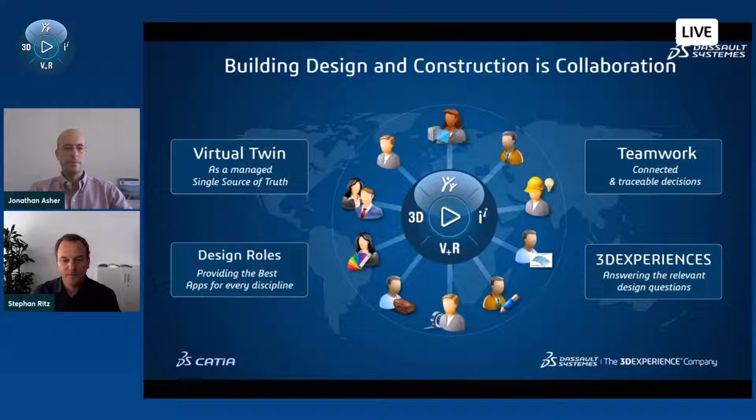So why do we do this? Because actually all the people involved in building design and constructions have a common need. They want to have a precise communication between all the different silos. They want to break the silos, precisely communicate, and take accurate decisions. And as one of the facts that I want to mention is actually they don't speak the same language. It might be sometimes a different professional language, so they are from different disciplines, so they have different ways to communicate, different ways to express themselves.

So there's already a first language barrier, but it's also an international industry. So design might be done on one part of the world, construction on the other part of the world. So just 2 examples that show us that there might be a lot of barriers to overcome in terms of language. And that's where we come to visualization, because what could be better than actually looking at the final building, the final construction, the final infrastructure, like you will see it when it's built, or your customer will see it when it's built. And since pictures on a screen, renderings or movies might be limited, we also add VR, because this enables you actually to jump in front of your building or inside your building, as you can do with the final construction, with the final building also.

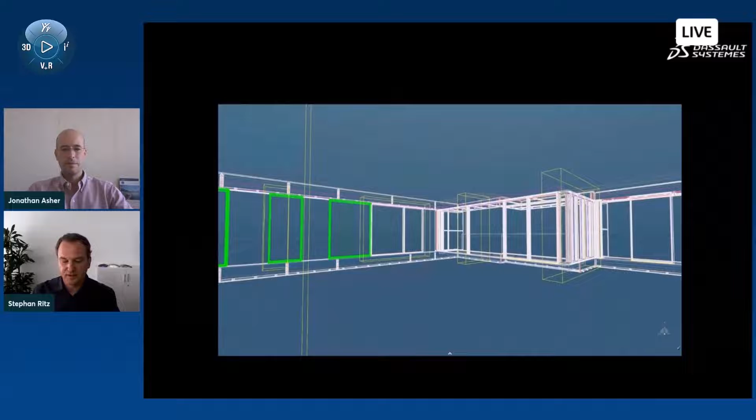So these are major aspects I want to highlight for you today. So visualization and VR, not just standalone, also connected to the power of the 3DEXPERIENCE platform and the major benefits I was introducing before. So this should enable you to take the traditional drawing, as Jonathan explained, and do 3D sketches out of them. This is already a very established and widely used capability. Also to make faces, surfaces, and rooms out of this is already quite widely used.

We go a level further now with CATIA Live Rendering. We introduce materials, so you can directly put materials, appearances on your 3D experience room. And it's not just the material that live rendering is adding, also the environment, because your construction site, your building might be located somewhere and has a certain context. Speaking about context, of course, live rendering is also enabling light and shadow. As you can see here, the lighting and shadow situation is quite important.

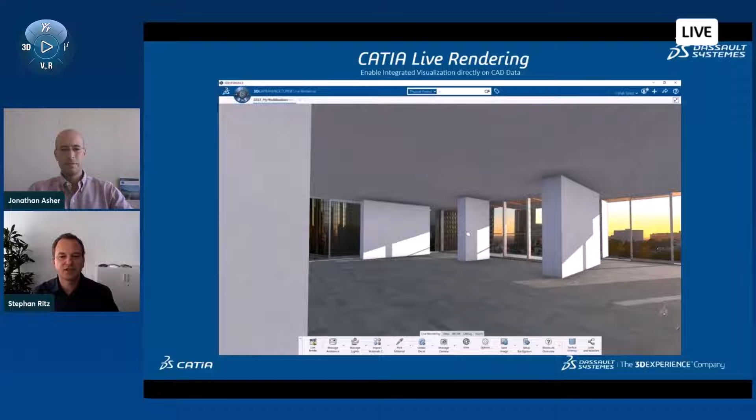It's also part of the context of your building or your construction site. And of course, it's not just a picture that we render here, it's actually a 3D experience. So you can really experience your building, your different designs, whatever you need in 3D. That's why we call it the 3DEXPERIENCE Platform.

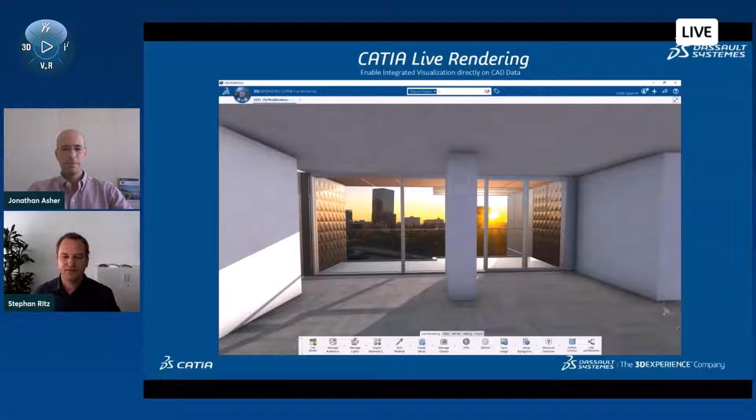What you see in here is OpenGL that's enabled in most applications in the design phase. Talking about precision, this is real-time rendering. Of course, CATIA Live Rendering is also enabling global illumination and ray tracing for very precise renderings and views, or interactive sessions to make a precise decision and really have everything taken into consideration from a realistic and realism perspective.

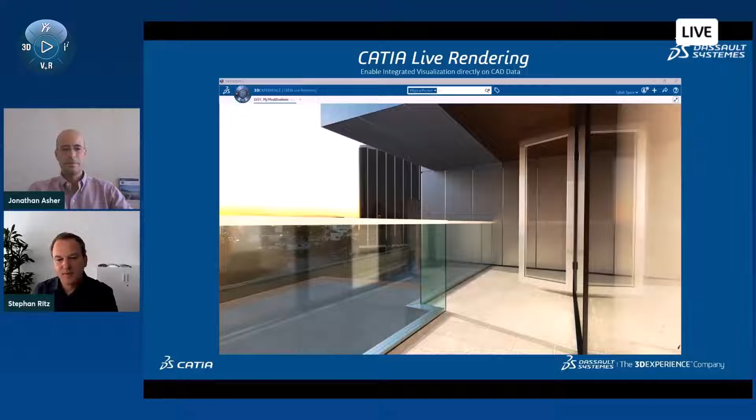So in a nutshell, CATIA Live Rendering is the first tool I want to introduce to you to create a realistic virtual twin with precise materials, lighting, and cameras to enable the collaboration and decision-making I was mentioning before, inside the 3D design process and inside CATIA 3D design apps.

In order to do so, CATIA Live Rendering is taking care of some very important subjects. First of all, materials, as I mentioned before, and there are different ways to work with material. I will touch it in a few minutes. Environments, we call them ambiences, to build the context and also the lighting situation of your future construction or building. Lighting, because it's not just the environment, it's also the building that might contain lights, so I will show you an example of how to create lights. And cameras, to create the specific views that you want of your building or inside your building or inside your site.

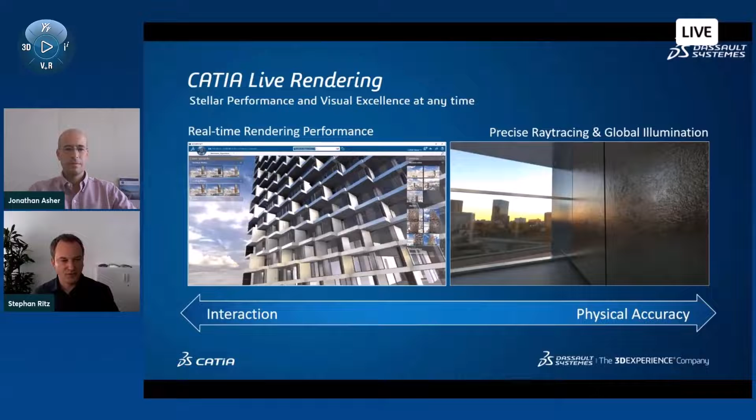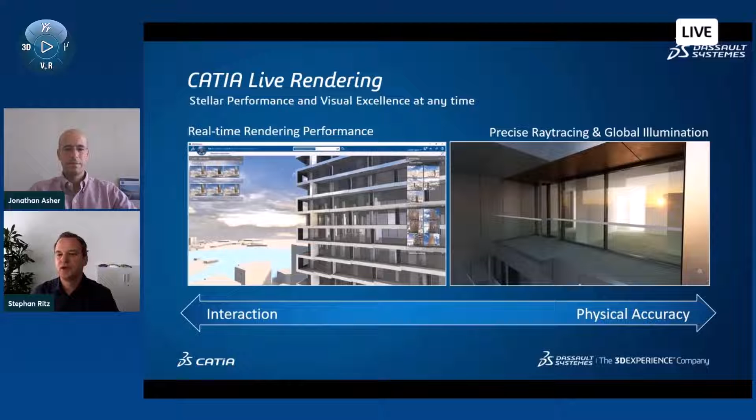It also provides you rendering capabilities, two different render modes that we were touching already in our introduction. On one side, we have real-time rendering, which is there to really interactively discuss different proposals, interactively work with your different design data. As you can see here, it is quite performing. It enables you to work in CAD, or as shown here, with already visualization applied. This enables you to really move around in your different design proposals, interactively having a decision-making process. On the other side, CATIA Live Rendering is enabling precise ray tracing and global illumination, as you can see on the right side. This is really the level of rendering that we will need for a final decision, and it looks like the final building in many areas will look like.

So we have here already touched a little bit with some examples from the interior and exterior, the four subjects. I want to go a little bit further and really go through the different capabilities with you in this little example. So first, we focus on cameras, lighting, and ambiences.

You see our interior here, and as shown before, the interior is interactively experienceable with global illumination. So it's really an interactive session. It might have limits in terms of judgment and realism with the OpenGL rendering, but it's interactive. We can switch on GI, global illumination, for precise lighting, shadows, and also the reflection and the colors of the reflection and the light. We can access here, you see also different components from the database.

We can also switch on lights that we built with live rendering. This is just a very quick example that shows you already that we can switch on one side between very precise rendering and very interactive rendering. We can leverage the power of the 3D Experience platform by bringing in different components and variants of our 3D design, and also leverage visualization here and the live rendering capabilities with the lights that we just switched on.

So that already showed the first important capability of CATIA Live Rendering. It has a light sources management that is quite flexible and also interactively usable. That means everything you see here in these menus can be changed while you run your global illumination session, for instance, and it contains live updates during your ray trace or while GI is switched on. So your interactivity in the viewport is possible even if you change parameters on the fly.

You can have different light types created: point light, spotlight, area light, or directional light. And the parameters are artistic if you want, or you can also choose to go to physical-based parameters. For instance, you can put in the color temperature in Kelvin, or the intensity in candela or lumen, if you have the physical parameters at your hand. We also support photometric lights. This is just one of the examples that shows you how powerful this function is.

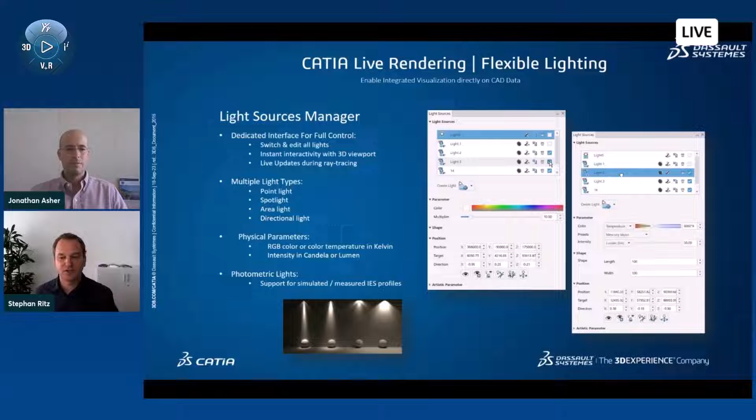But let's go directly back to our example. Let's switch on the light sources manager and see some of the lights in action here, some of the functionalities I described to you. You can switch through different lights. This time you are really in the light sources manager, you don't just hide and show them. You can adjust the intensity, for instance, and by adjusting it, you see the change directly in the viewport.

You can also change the temperature, for instance, of the color. And together with a choice of materials that we will touch on a little bit later, you get a very powerful session of visualization, a very powerful capability to judge your layout of the room in combination with the lighting.

That's a very simple but powerful use case that already shows how 3D experiences can contribute towards your decision-making process in terms of light, visualization, and materials. We have also other capabilities. We have seen an interior example. For the exterior, we have a built-in capability called the sun and sky system. Very often you want to decide for your building that it has to be lit at a certain daytime, and you know the location. With the sun and sky system, you can actually set this very precisely.

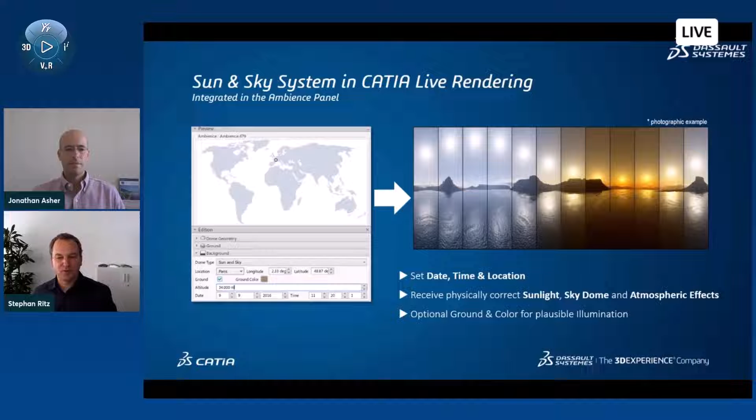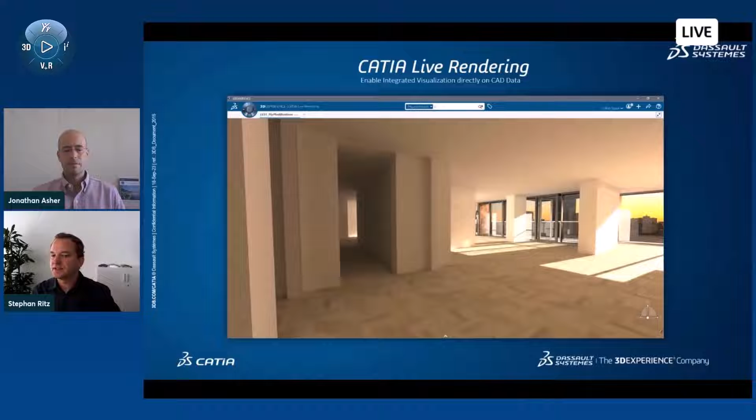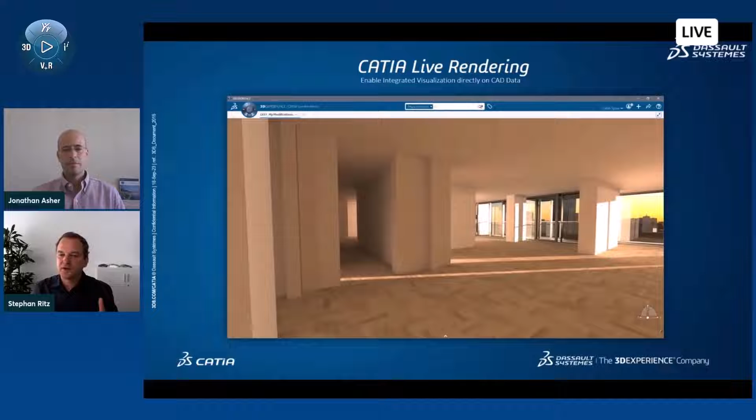So if you know when and where the building is, you just put these values inside the sun and sky system, and you get automatically a physically correct sunlight, including atmospheric effects, so the color of the light is changing. I used this also in our example for the exterior lighting evaluation. You see here the first lighting situation at a certain daytime, a later daytime, and even later, and it's changing—not just the light or the shadow, but also the light colors. So you see the reflection of the walls with certain light colors from the exterior create a completely different ambience and appearance in the interior of your building.

After seeing these first capabilities with cameras, lighting, and ambiences in the interior, I want to show you an example from the outside of the building, because it's also very important and interesting—there we can make much more use of the ambience capabilities we have built in. This is a little older example.

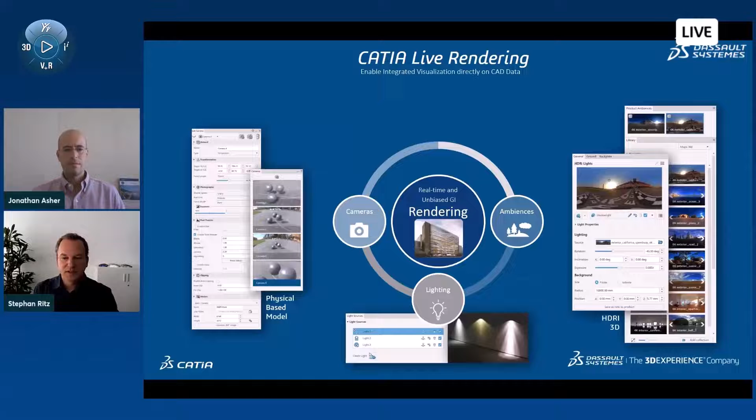That's why in the beginning, when we switch on global illumination, you see some first noise, but this accumulates quite fast. Then you see a good reflection of our ambience, our environment, in the windows. By changing the environment, you get a completely different reflection and a completely different look of our exterior. This is not the only functionality we can interactively use quickly—we can also take our light manager and switch on some lights in the interior. This way we get a very, very good assessment capability between interior lighting and exterior lighting.

I have to mention that this scene here is shown together with CAD makers at the NVIDIA GTC. So the data set is shown together with them at NVIDIA GTC, as some other examples I will show later on.

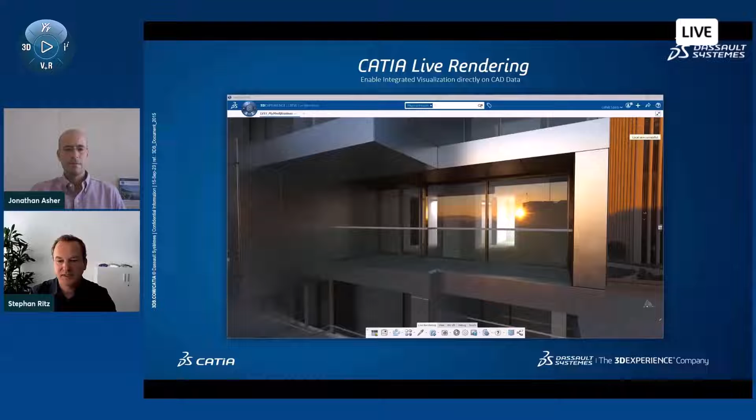So now we have covered use cases using cameras, ambiences, and lighting, with precise and real-time rendering from CATIA Live Rendering. Now let's take a look at the materials involved. As I was already mentioning, there are a lot of requirements toward materials, and you see that we have a range of usage, from precise measured materials to flexible procedural materials. That's why we came up with a new material type inside the 3D Experience platform, inside CATIA Live Rendering, that we call the DSPBR material model.

It is, first of all, an open model and open standard—it's GitHub documented, including examples and other subjects. So if you plan to build up your materials in combination with your CAD inside your environment, inside the 3D Experience platform, you have an open standard, so you are secure for the future.

The second thing is that the DSPBR material model is a physical-based model, so it provides physical accuracy across all render modes, which is also important for communication and decision-making. And it's prepared not just for Dassault Systèmes inputs and material standards, it's also reading material types and standards from other partners, and this puts us in an industry-leading position. I mentioned Adobe Substance for flexible material ideation, X-Rite measured AxF materials for precise measured materials that we will see in a second, and, for instance, NVIDIA MDL as another important standard in the industry.

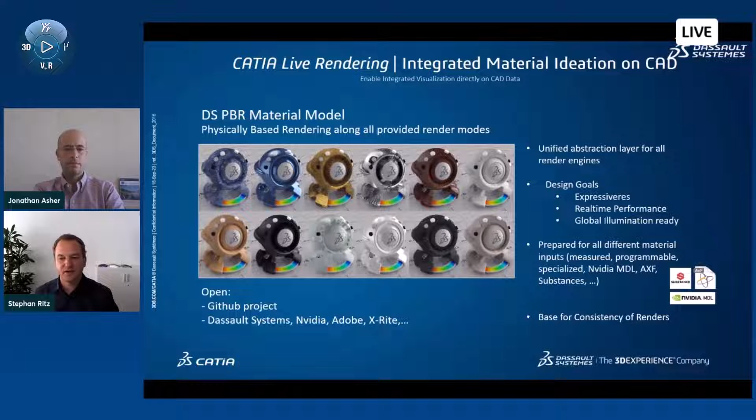This enables us to support use cases and manage a stretch between creativity and physical accuracy. On one side, we have in creativity the need for conceptual materials, where you don't know what material you want to experiment with, you want to explore possibilities, communicate the design intent, or define a target for your suppliers or other people involved. Then you need creativity and conceptual materials.

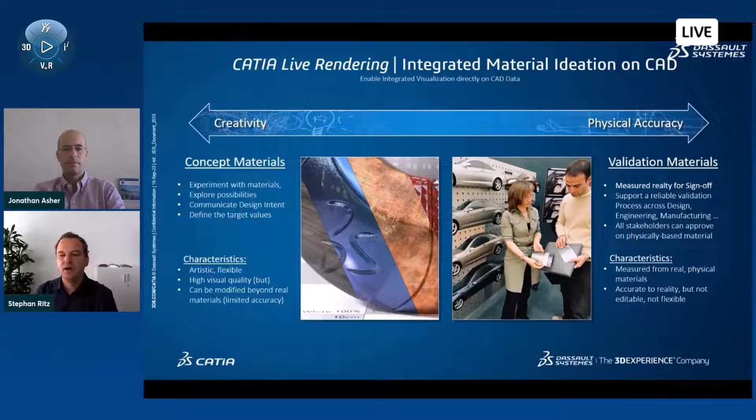On the other side, for physical accuracy, you might already have material. You have the CAD data that is precise and maybe already accepted by the customer. You have precise materials from your suppliers, for instance, and you want to scan them to be very sure they look like the final material and apply them directly on your CAD data. All of this is possible with the DSPBR material standard, which can contain many different types of materials.

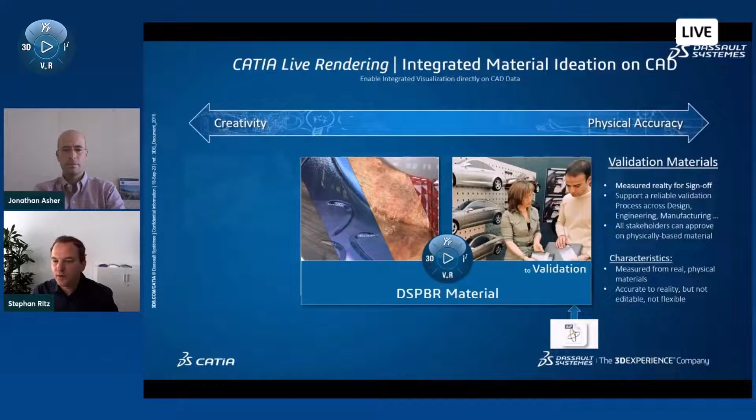Let me give you an example out of physical accuracy, together with the partner X-Rite. This partnership and the DSPBR material enable the following workflow very quickly: you take physical material samples, put them in an accepted, market-leading scanner from X-Rite to capture the material, process it with the PANTORA software to output an AxF format that can then be consumed by CATIA Live Rendering and the DSPBR material standard, and directly rendered on CAD data.

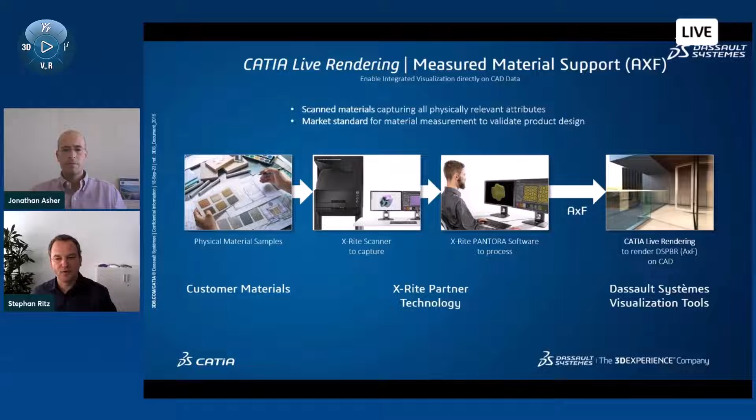That shows how DSPBR and this partnership from Dassault Systemes enable a really flexible process, because you can take a customer material, your own material, or any sample material. You can use a market-leading standard that we simply integrate with the DSPBR material and leverage the power of Dassault Systemes visualization tools on the 3DExperience platform. That's a very good example of how you can build a state-of-the-art process, leveraging the best of all worlds while staying flexible.

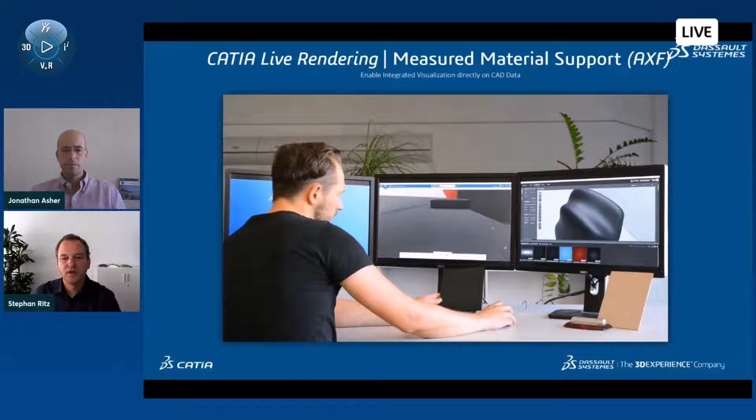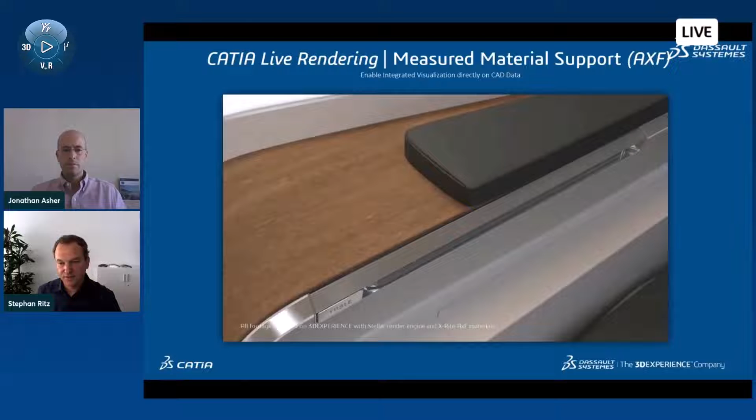So here's an example. We took this material and scanned it. I won't show you how to put it in a scanner, but what we can show is that we already have the AxF applied here in our scene. What you often see is a scene like this, comparing real and virtual. Then we can render very precise representations of our product. Precise materials and production-level 3D geometry, because it's really the CAD data underneath, combined with precise rendering capabilities, form the perfect base for a good decision, as you can see here with physically accurate materials.

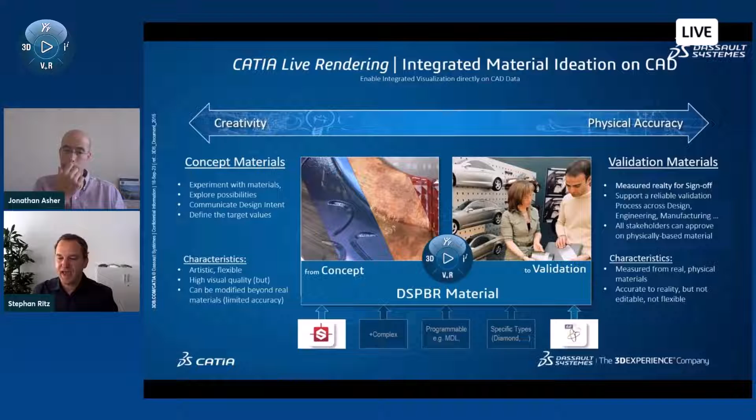After speaking about how we can use physical accurate and measured materials on one side, let's now look at the other side: how we can enable creativity with Adobe Substance Materials and their powerful usage inside the 3DExperience platform.

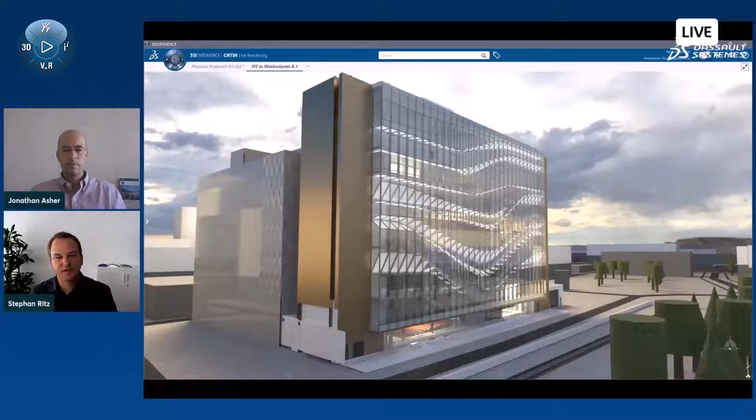So what are procedural materials? They are nothing else than formulas or mathematical descriptions of materials. You can use these formulas and inject parameters inside, and the parameters change the appearance of the materials. These parameters are exposed in CATIA Live Rendering in the software's interface, so you can interactively play with the materials and change them while they're applied on your CAD geometry. They're also compatible with real-time and global illumination, just to mention it for completeness.

Here's an example directly from CATIA Live Rendering. This cobblestone material is not a photo, not a scan, not a texture—it's a procedural material, a substance material. By moving a slider, you can actually add more water, change the pattern of the material, or reduce the water.

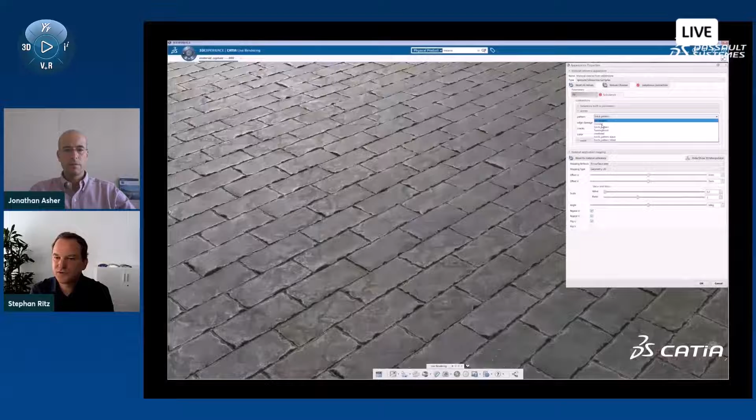You can say now, okay, that's a picture, but I want to show it also in action directly in CATIA Live Rendering, and show you the interface, and that it's really interactive and that you can use it in an interactive session. So we can change, for instance, the pattern, inject it in the formula, changing multiple parameters to give you different patterns. We have easy understandable parameters exposed here, like edge damage, that you can use to make more damage in the edges, introduce cracks, or change colors and other attributes.

It shows you how interactive and intuitive you can change a material and have a creative session on a different material type directly in CATIA Live Rendering in the 3DEXPERIENCE platform.

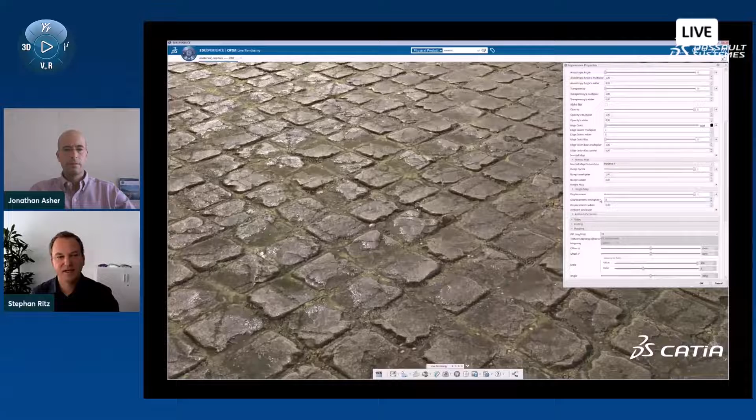So now in our example on the building, we actually applied a procedural material here on the facade that I was mentioning before. And the session was about what kind of facade, with which tiles, which size, and so on we can use. And when we take a look closer and open the appearance properties menu here, you see that we have some parameters exposed.

And we can change, for instance, the offset between the different lines of our facade. So we can make no offset or introduce an offset. This is already very powerful, and it's directly interactive, doable in CATIA Live Rendering.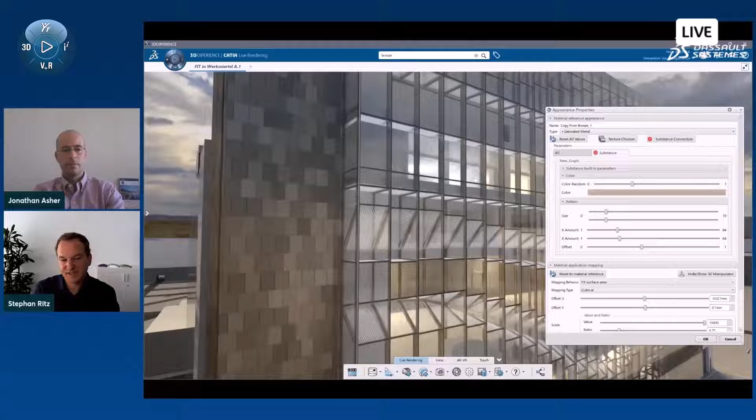You can also change not just the offset, but also the tile size and other parameters to really play with our design and get a first inspiration and maybe a first direction, or set a target how we can do the facade. You might mention, okay, it's not the right perspective, so no one will see it from this perspective except I have a building on the other side and I climbed up the stairs.

That's correct, and that's also something we thought about. And what could be better than standing in front of the building or jumping inside the building or seeing the facade from the perspective of a pedestrian like we will do on a daily basis later on. That's why we combined the use case with our CATIA immersive enablers.

So these enablers are there to make or enable an immersive experience directly inside the CATIA applications. We have the virtual reality reviewer and the immersive visual experience for single user, supporting HMDs, immersive walls and caves, and the immersive collaboration experience for people to work together.

And it's so special because they are just enablers. You can keep using your software with what you did before, with high quality visualization or not. It's directly enabled inside the 3D experience application. You can have it immediately available, so you don't have to switch your workflow or something. You just switch on VR. There's no data conversion and no tool change involved.

For our example, we use virtual reality reviewer and immersive visual experience. We take CATIA Live Rendering as we have used it before in the desktop mode and empower it with immersive visual experience or virtual reality reviewer to be VR ready. And what you get actually is a hybrid environment, so CATIA Live Rendering VR, we call it.

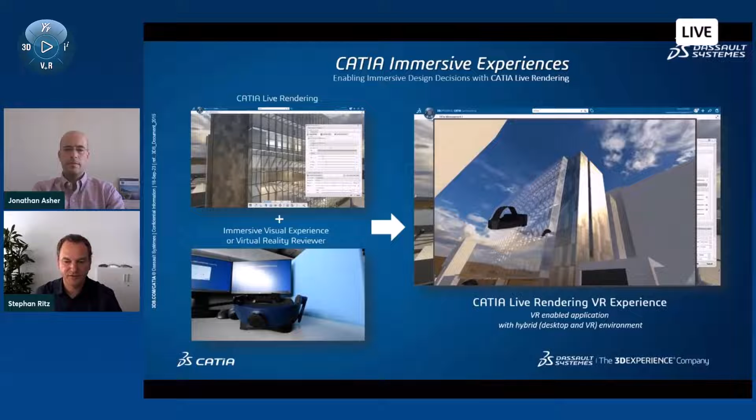So we can see in VR directly our data. We can stand in front of our building. At the same time, we have still our original tool, Live Rendering, here for hybrid usage ready.

So here's an example, a very simple one that explains what we mean by this. You see here actually one person in VR and the other person working on the 3DEXPERIENCE platform with CATIA Natural Shape. They are changing the native geometry. They are working with it, with the native tools in Natural Shape, and do just a simple example here, changing the valve.

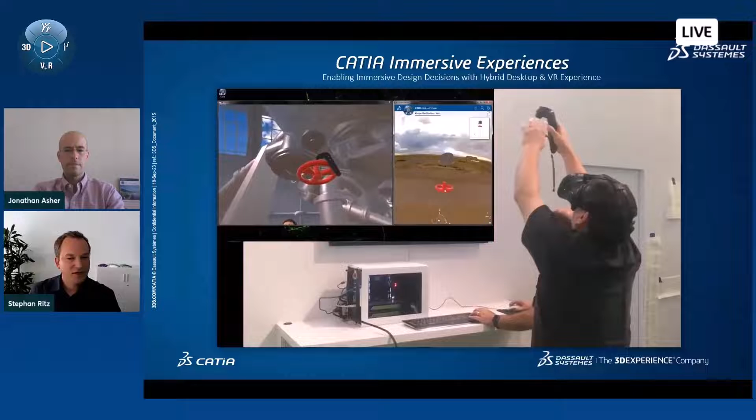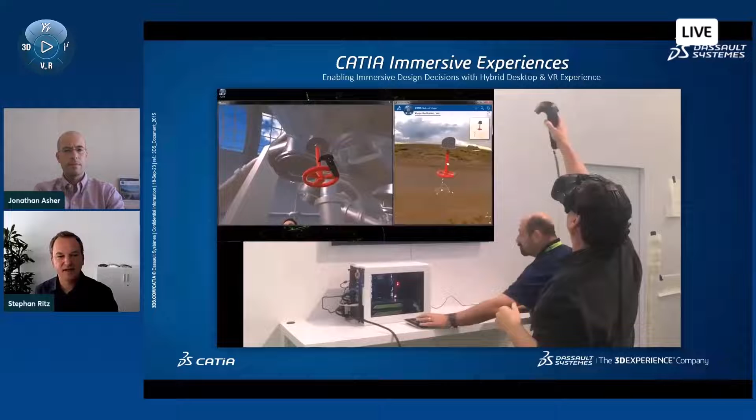They make it a little bit longer. And at the same time, while an engineer, for instance, on the desktop is doing his design, another person can check the usability, can evaluate it directly in VR. And this can be done not just with simple examples like this. This can be done, of course, in a much more complex context.

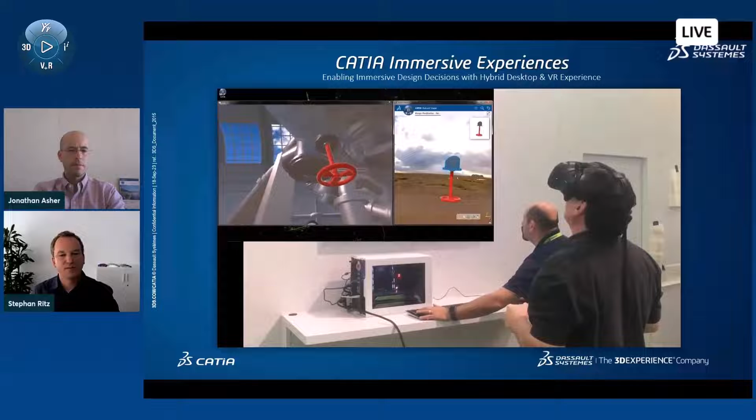Very simple example that we want to use now together with our facade. So when we come back to our building and the facade example, you see two people are working here, and the person on the desktop is still in control of the procedural material.

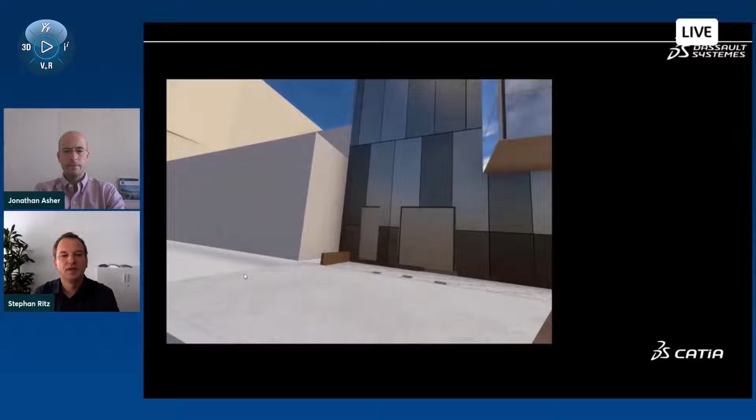The other person actually is able to do what we were desiring before. It is able to walk in front of the building, walk around, take the view or perspective from a pedestrian or from a later user on the street.

And that's very powerful because you see that the different perspectives together with the correct lighting situation, reflections, and so on create a completely different appearance and also a different feedback maybe. And then you can still play with the same capabilities that we have shown before.

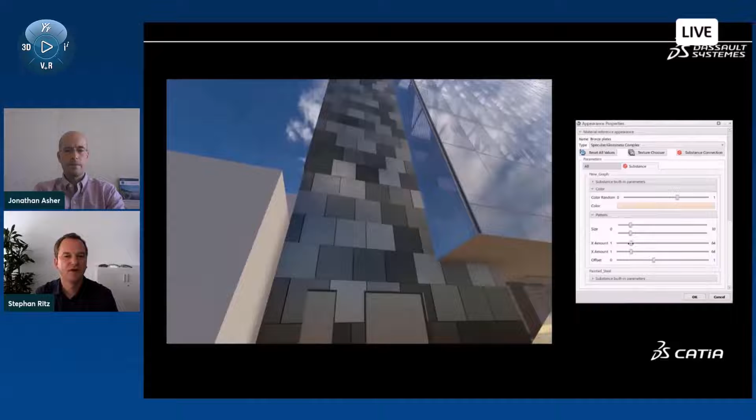You can adjust the tiles here. You see that the reflection is also very important for the smaller tiles. And you might get completely different results from this perspective than you might have from your desktop session that we have seen before. Of course, we can play with the offset, which is a very important functionality here in this demonstration. But also you see that there is a kind of different color randomness.

This we can also reduce, and we can expose many more parameters. What we see here is just examples.

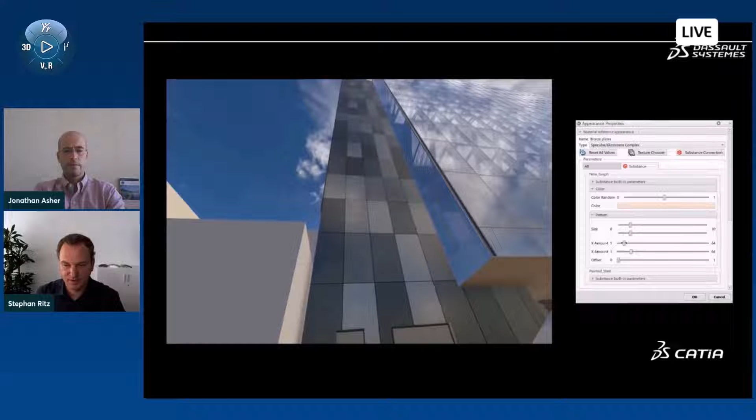So it shows you how powerful the combination of visualization, procedural materials, and immersive enablers can be in a very simple use case. So we have seen already a powerful example on the facade in terms of tiling and population of the different tiles and how we arrange them and also what differentiates them. We can do also material ideation on a very precise and high quality level.

So what you see in here is a material that you might face from very close because it's on a balcony of a building. You see here that actually the material, by just a change of a parameter, can get much more detail. And the reflection together with this detailing gives you a very good first insight on what you want and how you want to actually use material and what material do you want to use.

Of course, we can go on and add more detail. You can even add more structure and see that we have a completely different appearance also in terms of reflection. And since we are in a creative session, with all the flexibility and interactivity, you can also decide to change completely the whole appearance and also the structure to start maybe with a complete new approach.

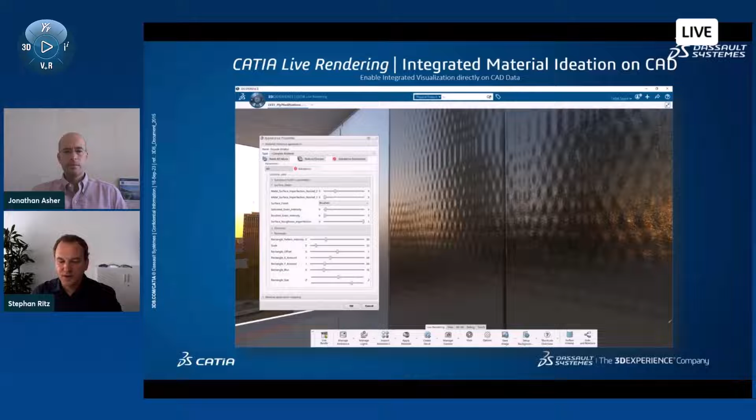So in fact, what it was is it was a live interactive session, a discussion between two people. Two people that had different samples and different inspirations and played with the material in front of them, directly applied on the CAD data. So all of this is really interactively usable and was really used in a discussion between my team members that made the demonstrator actually. At any point in time, that's a good thing.

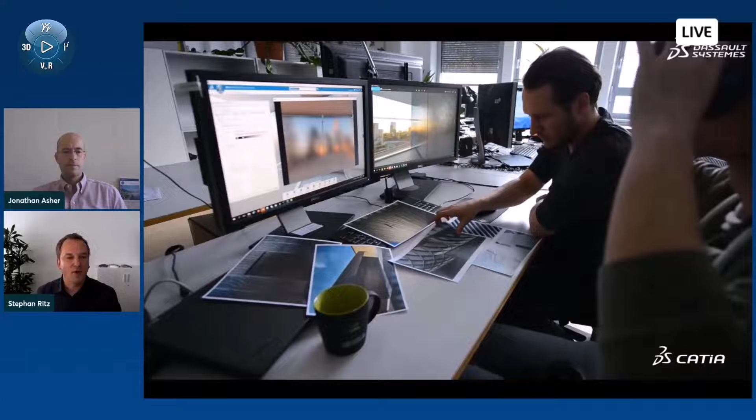You can start VR now and walk on the balcony and see not just the impact of a single perspective on the material here. You see how all the attributes and all of the things that you get out of a realistic perspective when you walk on the balcony. So you see here, by changing the material, the reflection is completely different. And this gives you a very good insight for the final material.

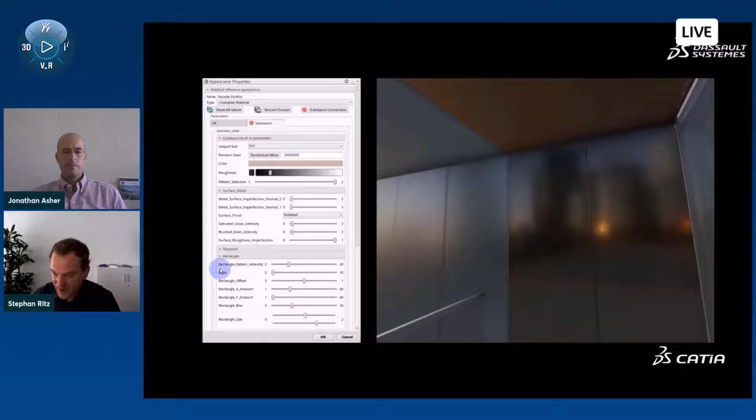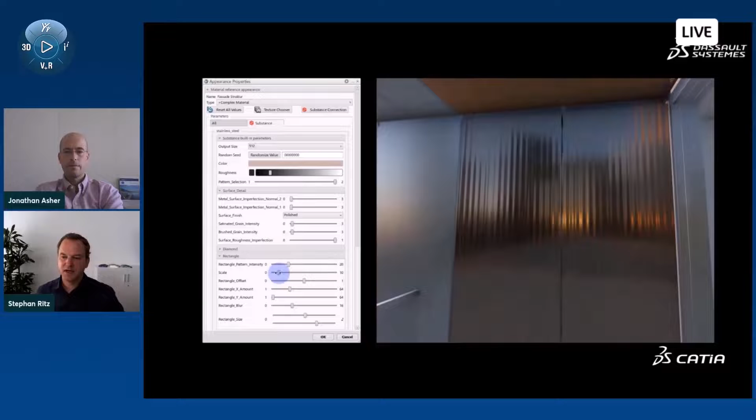Imagine that you would have this capability not just between designers, but also between designers and suppliers or suppliers and customers. It gives you a certain capability to really have a very precise communication and also an accurate decision capability. That's what we mean by this.

So we have touched now a first use case, or a set of first use cases, that showed us materials, different types of materials, ambiances, lighting, cameras, and also capabilities to combine this with the immersive modes to make accurate decisions. I want to push it a little bit further with the usage of immersive collaboration.

And this is a very good collaboration tool. And talking about collaboration, I want to come back to the slide that Jonathan showed initially here for the project delivery methods. Because you said, Jonathan, that it's a drawing-centric industry process and a lot of different silos are involved with this. And we want to show with the 3D Experience platform, with our visualization and immersive capabilities and the immersive enablers, that we can really help here building bridges.

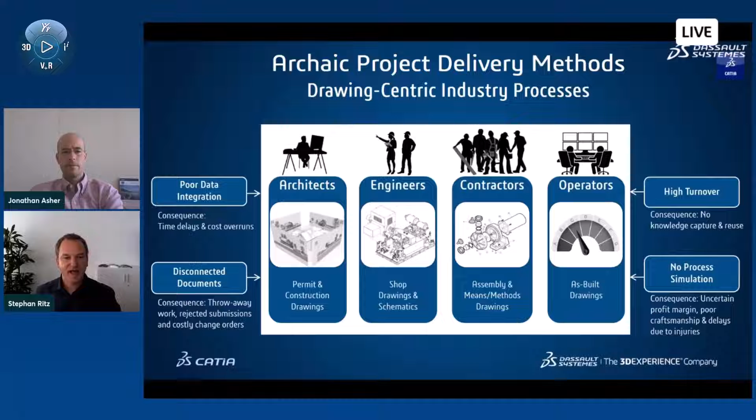So what we did actually is we took the drawing, we built in CATIA a 3D representation of the drawing. So we built 3D, an etage or a complete building, out of the drawings. We overlaid the drawing with the 3D, and by doing so, we got some very interesting insights.

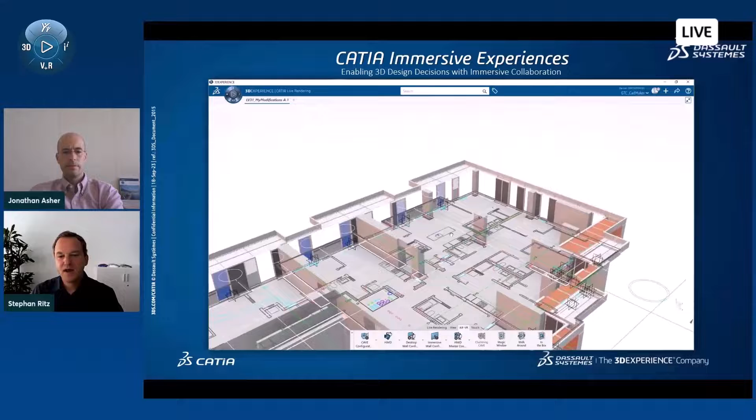So meaning, at any point in time, you are able, for instance, to check if your 3D matches the initial drawing, which is quite convenient, of course. And it's something that is given with the CATIA features. But you are also able to see, are there things in 3D space that you don't notice on a drawing? And this thanks to the power of 3D, the 3D Experience platform, and all the interactive capabilities.

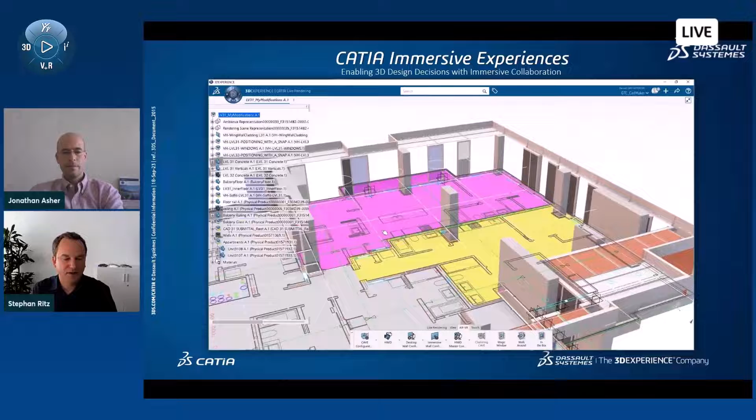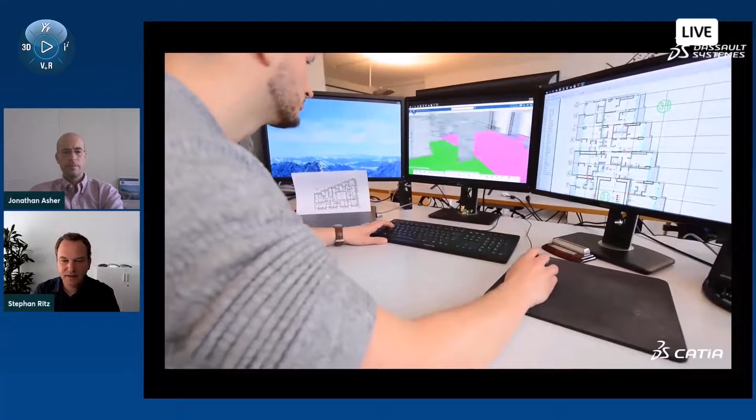You can also add, as seen here, more information like the layout of the different flats. And this is already on its own a very powerful functionality. But as I said, the 3DEXPERIENCE platform should enable collaboration between people, and we have the immersive features on top.

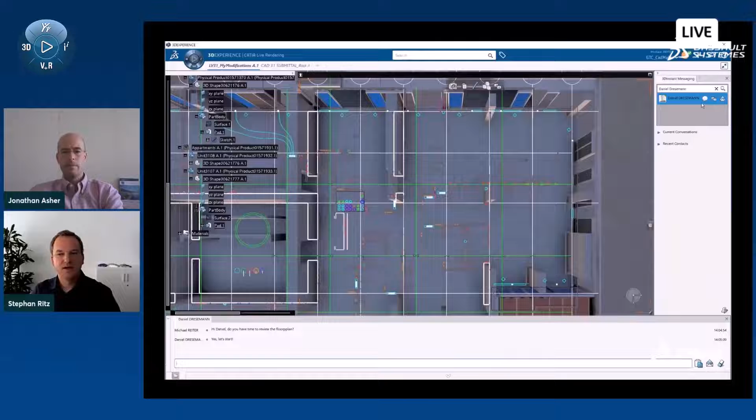What you can see here is that after one person has done his evaluation with 3DInstant Messaging, he can chat and communicate with other people on the 3DEXPERIENCE platform. They can meet, starting an interactive session with a co-review, sharing the data so they both look at the same data set from the same perspective and have a discussion on issues they want to highlight.

Once they are done with the desktop session, at any point in time they can also go into VR. What they can do in VR is meet in their plan, in their 3D, like they would meet in their construction site. This is a powerful session where people can bring different sources of information together, synced on the 3DExperience platform, and have a discussion in one-to-one scale on different perspectives and points.

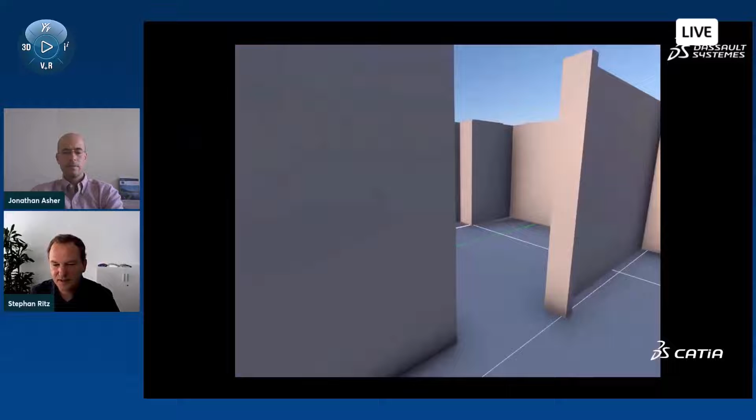You can see one person jumping out here, going into hybrid mode, switching on some walls that they have already built up, while the other person keeps working here and judges already how it's looking from a 3D perspective, like it will be on the construction site later.

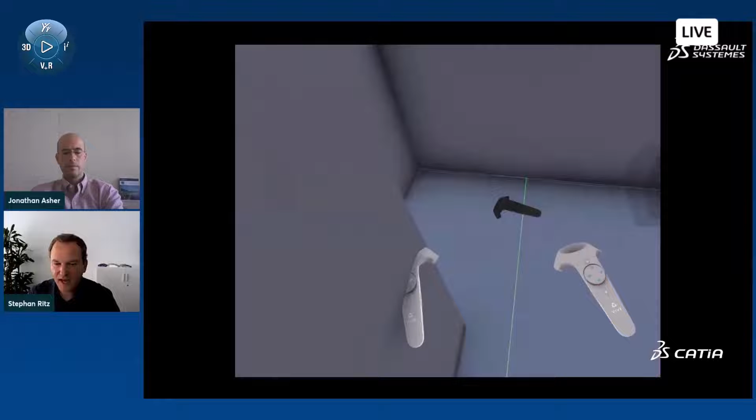It's not just this single functionality, there's a lot of power enabled. Together you can go into tight spaces like here, you can see in one-to-one scale if it's working from a customer perspective. Here it's a bathroom example. You can see if penetrations are working or if they are overlaid. You see effects and things that you just see in 3D and one-to-one scale.

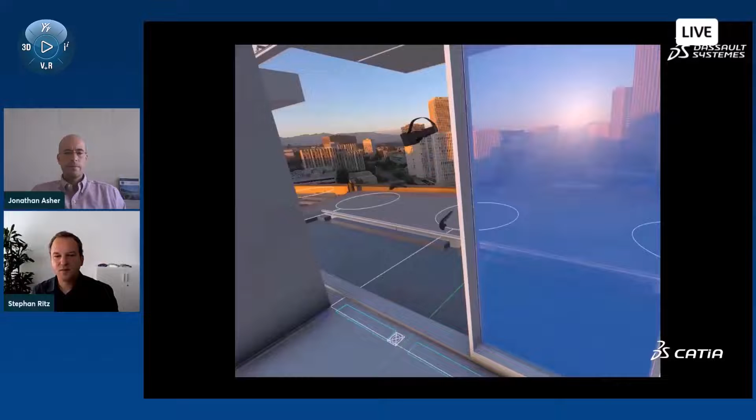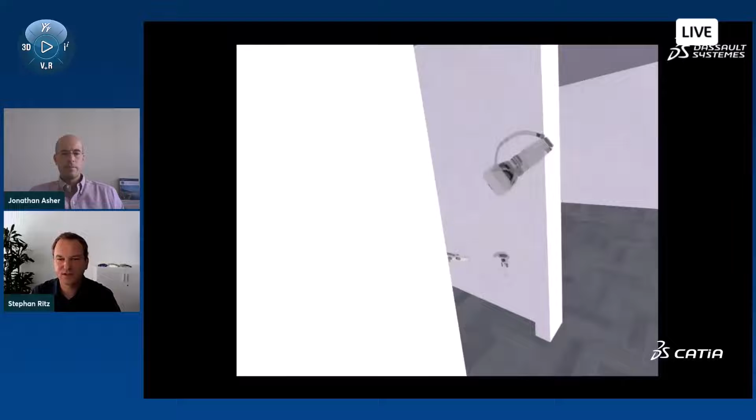What you have enabled here is usually something you might have later on when you have a construction site, but this is already all enabled during your 3D design at a very early stage. We even brought in first materials, not just to have a CAD look, but also to see lighting and shadows and the materials live. This way you can have a discussion like you would later with your customer or with people on the construction site, already very early.

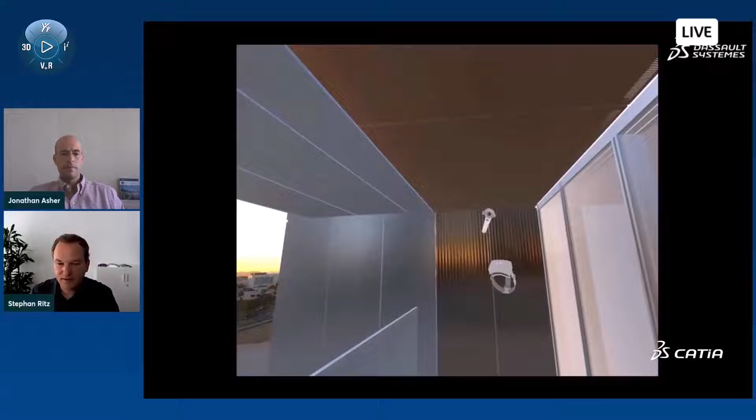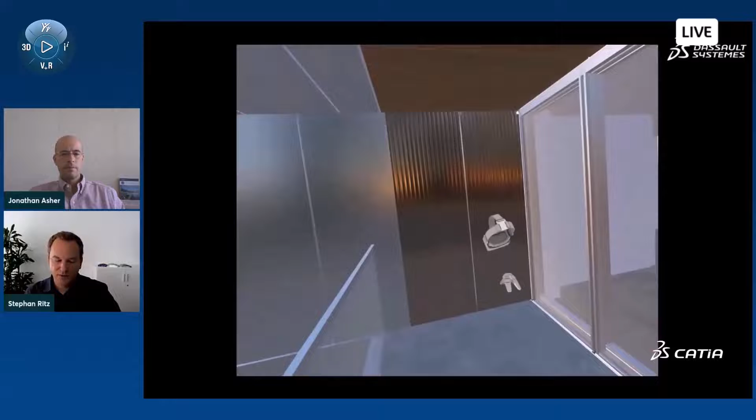It's collaborative and it's also a good communication tool for suppliers. When you take a look on the balcony, you'll see it's not just simple CAD geometry. We also find our little example here for the facade design we did before. It's there, it's available, it's all in one virtual twin. So this way we show how we can build bridges between disciplines, enabling collaboration between 2D drawings, 3D, and everyone involved in the process.

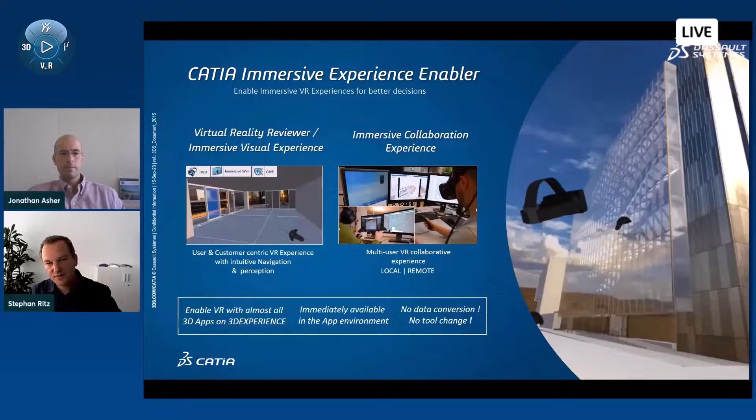Now that we've seen the power of our immersive enablers together with the capabilities of CATIA Live Rendering and visualization, I'd like to highlight one fact we haven't seen yet. We created a lot of different materials - for measured materials, we created many different options, so we have one material but different proposals.

For our facade or side panel of the balcony, we used different ambiances, different positions of the ambiances, or we can switch between different lighting options, or different camera positions or views. This is nothing else than creating multiple variants, and this is possible for visualization but also for 3D design.

You can have different options, different variants of your building for different walls, as well as different variants for your materials. What can we do to support people having a precise discussion on these variations without needing to meet in a specific design tool? That always carries the risk that one expert knows the tool while the other person might not be familiar with it. So we created an application that enables people to meet with a very simple interface and make efficient decisions on variants of your design.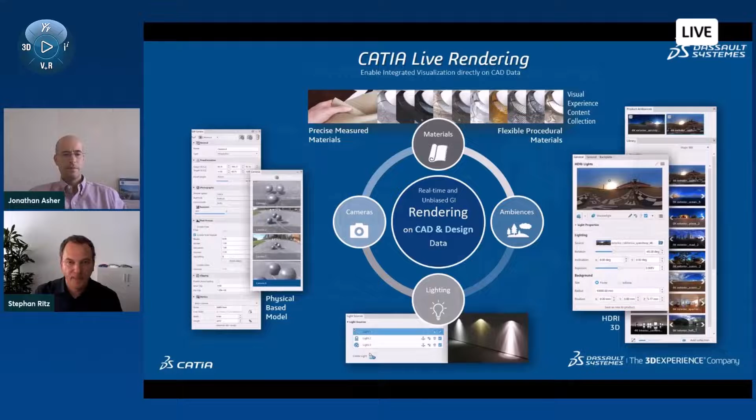That's actually the CATIA Product Perception Experience. It's an application that enables accurate design decisions on the fly, leveraging high quality visualization and VR, as we've seen before.

You can bring in a lot of different variations, as I mentioned: 3D variations, different packages of 3D, surface variations, different materials, different HMI options, different humans, different simulation results, or even kinematics or behaviors. So a lot of different inputs, and many more you can bring in here to take a decision based on them.

What you can do is actually capture, categorize, and filter these alternatives. And with this, you filter your decision. So you can set favorite or reject a variant, and so on, all with a very intuitive interface.

Let's take a look at the example on the upper screen. Two people with this application can have an active discussion on a building, switching through different variants of 3D, or just materials, or different perspectives, as you can see here. This shows that it's very efficient, and you don't need to know a specific application, because what you see here as an interface is just the variants you want to discuss, exposed.

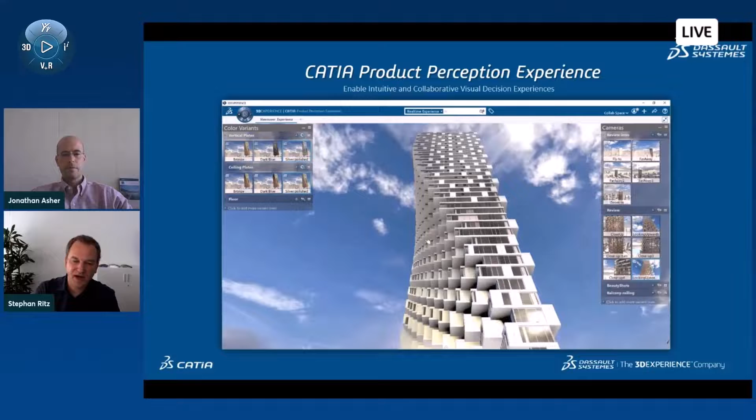This way, everyone is invited to have a discussion and participate in a decision-making process. We build bridges between different disciplines that want to meet at a certain point without knowing the other one's specific or specialized application.

For your information, CATIA Product Perception Experience is not just capable of running real-time or OpenGL graphics, it can also run in GI. At the end of your decision-making process, you can also render ray tracing and GI pictures, images, or movies out of this software.

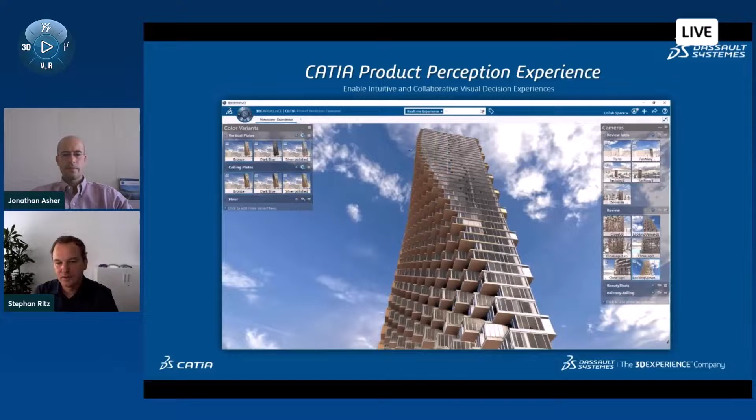As I said, we should enable everyone to make a decision. But in fact, you might look at the examples and say, okay, but I'm not a visualization expert, I'm not an expert at building up these experiences. That's why, if you've looked at the slide carefully, we also have a visual experience content collection, as shown here beside the materials.

This content collection is an enabler that just contains content. You have 3D content inside, so if you search for a plant, a chair, or a table to illustrate the interior of your building, you can do it. If you need an environment because you don't have one ready, but want to put your building in context, you can choose from a library of environments. We also have different humans inside with different clothes, if you need humans as a reference.

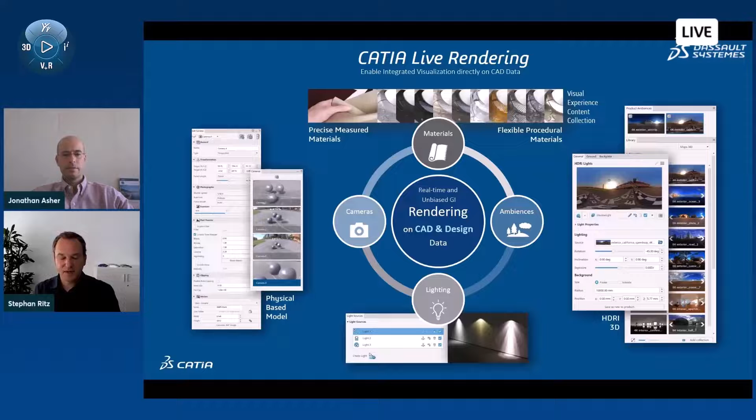We also have a lot of materials inside, and the materials I want to highlight here because this is a very good enabler for everything I've shown before. In the visual experience content collection, we have over 190 high quality materials, measured ones as well as procedural ones, to cover a wide range of different use cases. As introduced before, the procedural materials actually enable you to work with a lot of different variations of materials, enabling much more than 190 appearances out of these materials.

I will show you some examples. Glass, for instance, is in the package, because as a person who is not a professional visualization expert, you might find it difficult to set up glass. Metals, with all the different metal structures, are also built in. We searched for good industry examples to make it quite easy, and all of these metals can be directly applied on your CAD data.

We brought in wood as well. There are many woods inside and different approaches for wood, because it's also widely used these days because of sustainability. There is a wider usage of wood, for instance.

And of course, stones and concrete with a lot of different types that you can use directly and easily put on your CAD data, to easily express what should actually be the material you're using in your building design or on your construction site. You see different qualities here that express quite well the quality levels we can also propose directly on CAD data. And yes, you find a cobblestone example also available in the visual experience content collection.

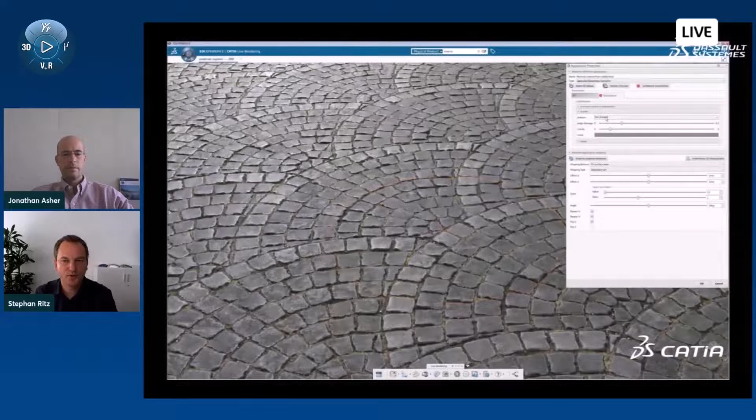I also want to show some materials that are maybe not so interesting for the building design and construction industry, but show very well how far we push the quality for materials to be applied directly on the CAD data inside the CATIA applications.

This content collection, together with our visualization applications, enables you to make precise renderings quickly and efficiently inside your decision-making process, based on your CAD data, leveraging real-time or, as seen here, ray tracing or global illumination rendering, for as many people as we can enable with all the tools available.

Before closing, I want to make one more comment about CATIA immersive experiences. What I introduced is the hybrid mode, working with one application on desktop while another person can see the results in immersive mode. If you use some of the 3DExperience applications, like CATIA Creative Design Experience, CATIA Natural Sketch, or CATIA Product Perception Experience, it's not just a hybrid mode that we enable.

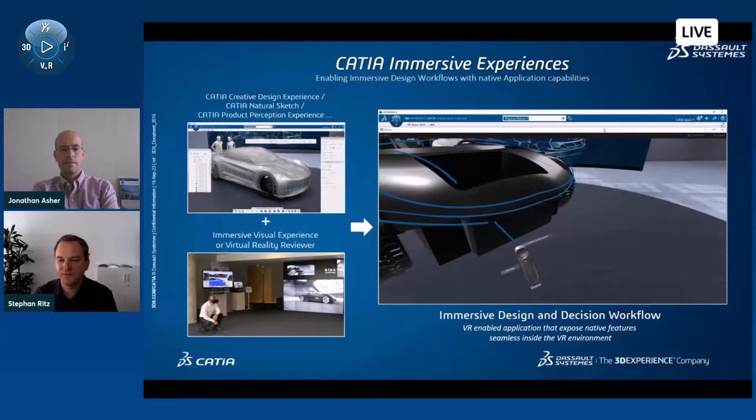The application exposes, as you can see here with CATIA Creative Design Experience, its desktop sketching functionality in VR mode. You don't have to be two people anymore, you can be alone and directly work with the function you used from the desktop, in VR. Very powerful enablement, and worth mentioning because you will face this situation often: working alone. Also in VR, you might get insights into functionalities on the desktop that you don't have when you're not at one-to-one scale.

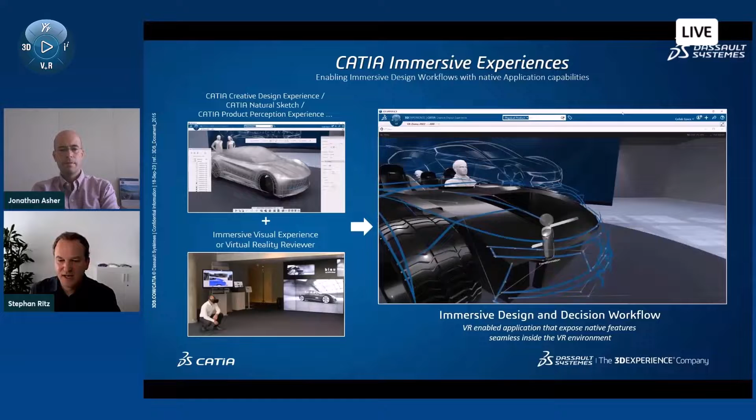I think we've seen enough from an automotive example, even though it's quite impressive. Let's also see this functionality directly on a building design example. This is CATIA Natural Sketch on a balcony, showing how you can sketch directly at one-to-one scale.

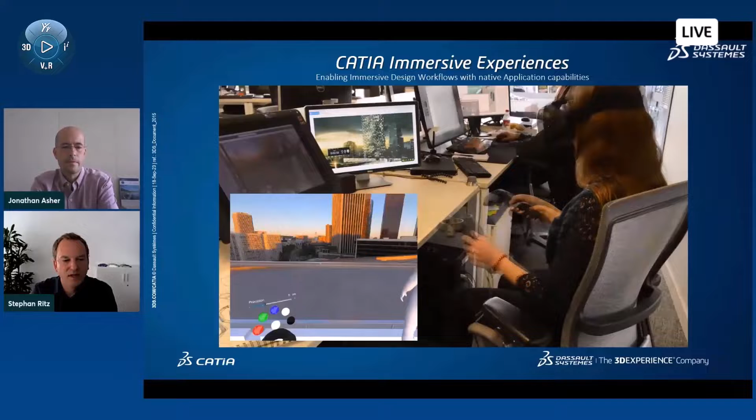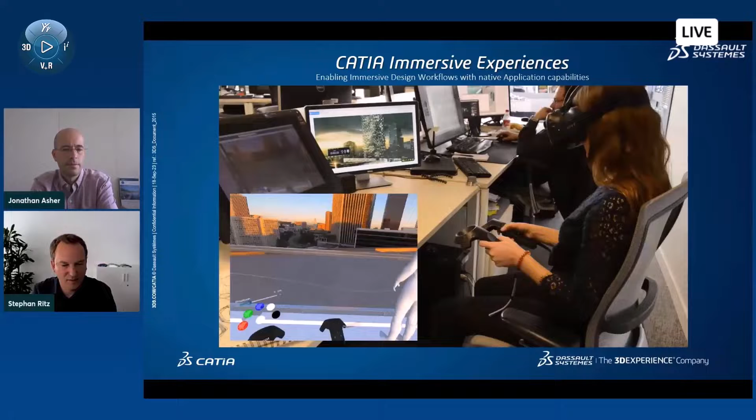It's a very simple example where you just draw the lines from the perspective of someone standing on the balcony. You see that it smoothens the lines automatically, a built-in functionality like on the desktop. But the power of VR here is that you can really judge the curves and the perspectives correctly.

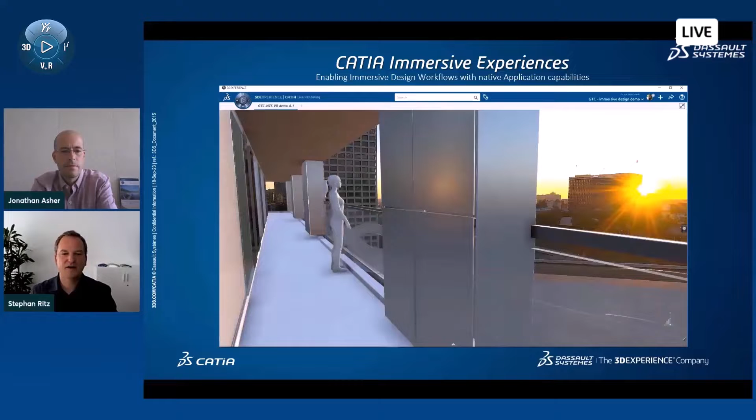After you've done it in VR, since we're on the 3DExperience platform, you can go to applications like Generative Shape Design, reuse what you've done in the VR session, modify it as you see here, and keep working. I don't want to make this too long, I just wanted to introduce the capability to have full VR design or decision-making processes with the power of applications exposing their features in VR.

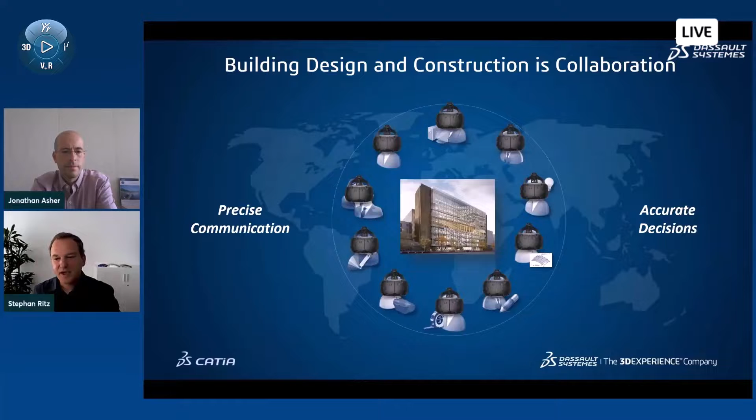This concludes my talk on how visualization and virtual reality enable precise communication and accurate decisions inside building design and construction, while also leveraging all the capabilities of the 3DExperience platform.